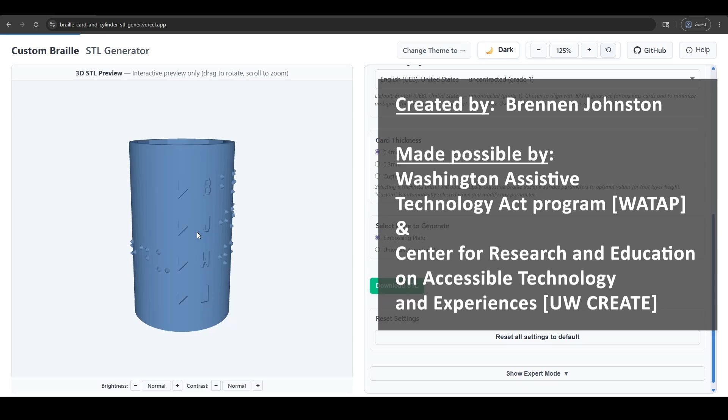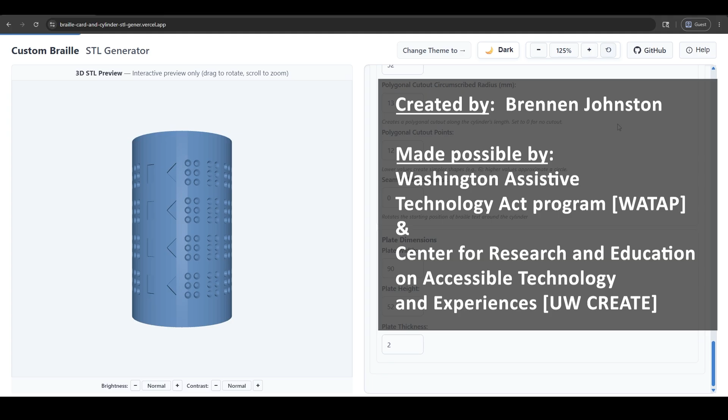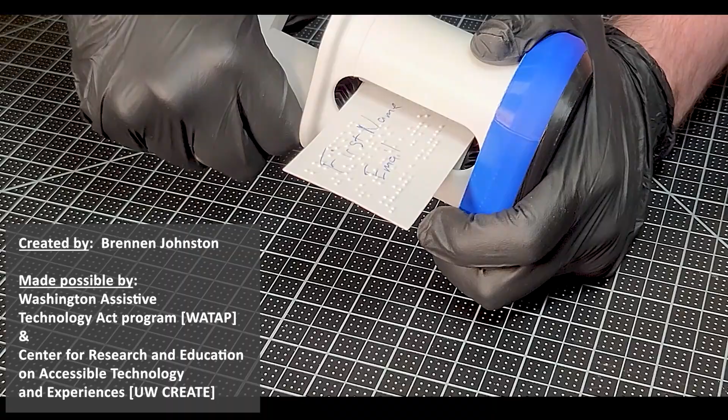In this video, we're going to create a custom Braille embossing cylinder from start to finish. Then download the 3D printable STL file for both the embossing cylinder and the counter cylinder. Both of these parts are needed for the 3D printed Braille embosser, which impresses a readable Braille dot into cardstock. By the end of this video, you'll have 2 printable STL files. In the next section, I'll cover 3D printer setting recommendations.

First, we'll start at the Braille Customizer app in a web browser. So here's the starting page. On the right side, you've got your text input area, language selection, card thickness, and plate selection, which is where most of the work happens. On the left is a 3D preview. It'll update as soon as you press the Generate button at the bottom of the menu.

You can find the accessibility controls at the top. You press this button to switch between dark mode, light mode, and high contrast mode. You press this button to increase font size or decrease font size. The 3D preview panel has its own brightness and contrast controls.

Before you type anything, the most important decision is figuring out what to put on the embossing cylinder. For this Braille embosser, it allows about 13 Braille characters per line. That means you won't be able to translate everything from a standard business card. The Braille Authority of North America, BANA, has published a prioritized list of recommendations for translating a business card into Braille for exactly this situation.

Translating your name should be top priority, and then at least one contact method. Next would then be job title, then mailing address, then fax number. For a more detailed explanation, please click the Help button in the top right corner, or use the link in the info panel. It covers what to include and why, and a couple of examples, which is all backed by BANA's recommendations. I'll paste all of my business card information into this Braille Customizer text area.

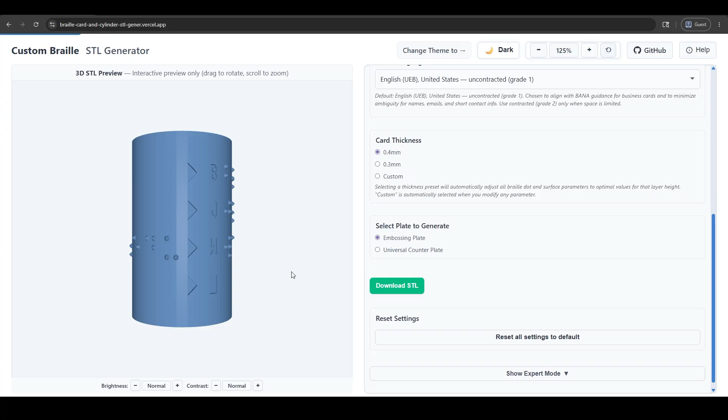Once it is fully generated, it'll appear on the left in the 3D preview panel. If you're using a mouse and keyboard, you can click on the cylinder to drag, rotate, scroll, and zoom, or you can use touchscreen controls to do the same thing. If you've generated your cylinder, you'll be able to see the braille dots on the cylinder surface.

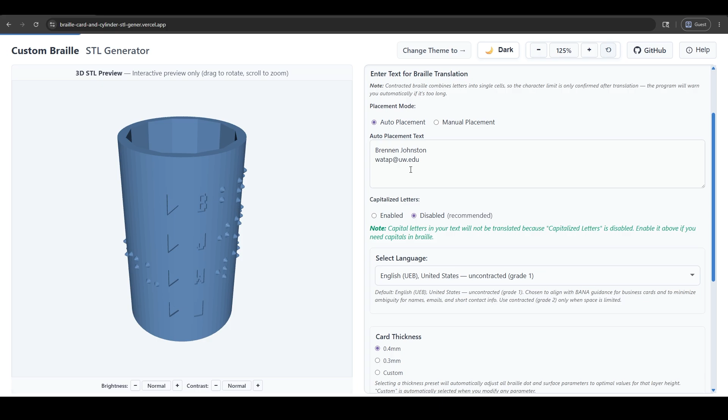Here in my example, this is the indicator shape area. Here, you'll see the indicator letters B, J, and W, which is just the first letter of each of the first 4 words. These indicator letters are to have a built-in labeling system for non-Braille readers. That way, if you print more than one Braille cylinder, you have a quick way to tell them apart.

Now let's download the embossing cylinder we just created. If it's successfully generated, then the Generate STL button should change to say Download STL. We'll click it again, and it'll start the download process. The embossing cylinder file should automatically be named after the first word that was typed into the translation.

Before we're done, we need to generate and download the counter cylinder to complete the pair. The counter cylinder has all the Braille dots activated. It was designed this way so that it could be used with any custom version of Braille that you might generate. So as long as the card thickness setting is the same, you'll only need to download and print one counter cylinder for as many custom cylinders as you would like.

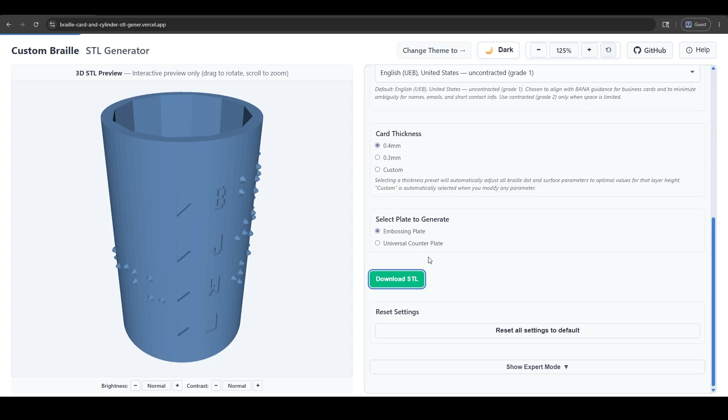To generate it, scroll down to the setting, plate selection, and select Universal Counterplate. Then press the Generate STL button again. Then press the Download STL button again. If you're going to experiment with different thickness settings, I recommend you add that information to the file name that you download. For example, counter cylinder 0.4 millimeters, so that way you don't have to second guess the size later.

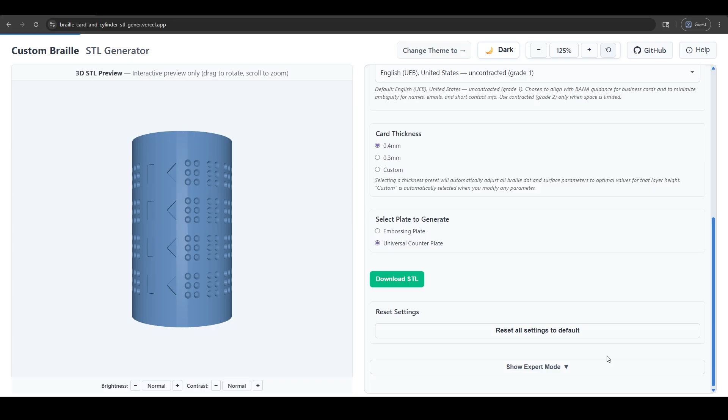For advanced control, there's an Expert Mode button at the bottom of the page. This section lets you control dot shapes, dot spacing, and many other things. You can find more information on this section in the help guide.

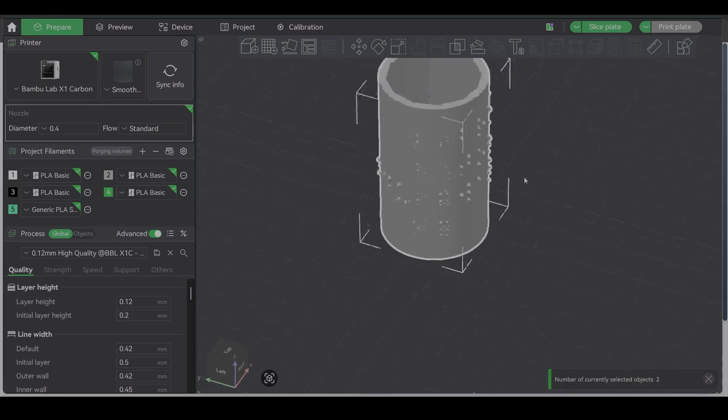Now that we've generated and downloaded both of our STL files, let's move on to 3D printer slicer settings. First, import both STL files into whatever 3D printing slicer software you'll be using. I'm going to be using Bambu Studio. In my experience, the seam painting feature makes a significant difference in Braille dot quality.

Most automatic seam placement settings will try to hide the seam in a visually inconspicuous spot. Common places are corners, edges, or inside recesses. It's totally fine for normal prints, but it becomes a big problem in our Braille embossing process. If a seam is placed either on a Braille dot or within the recess of a Braille dot, it can significantly change the embossing dimensions.

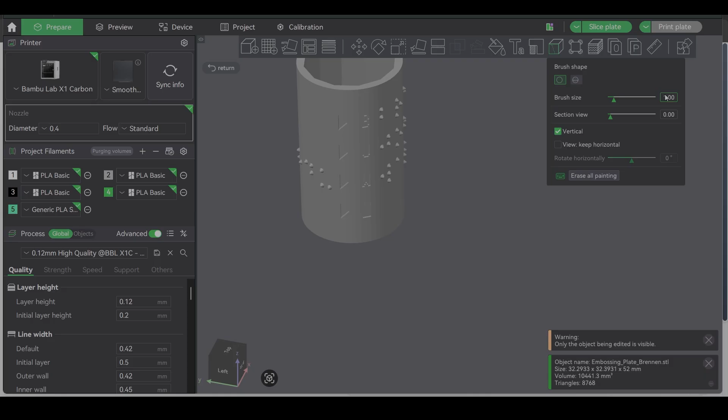So I recommend using the seam painting tool, so that way you can control the seams and place them away from all of the dots. I've set the seam painting brush to vertical mode and increased the size to 4. I've chosen to paint over the indicator letters and triangles. This now tells the slicer to put the seams in this area only. Don't forget to also do the counter cylinder.

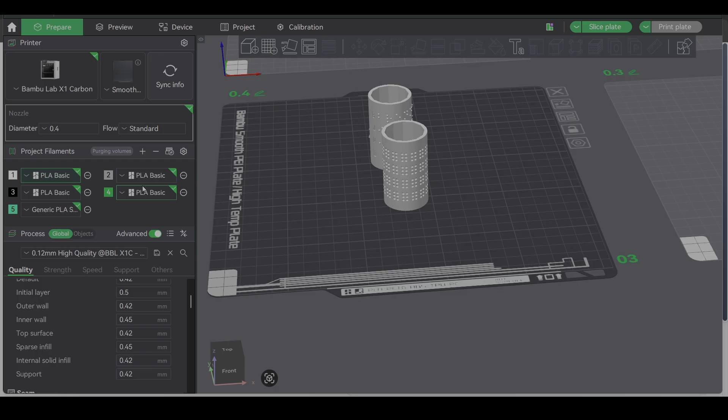I'm using a Bambu X1C 3D printer, and the following settings are what worked best for me. I start with Bambu Studio's high quality preset, but I've still had pretty good results for anything smaller than 0.2 millimeters. Here are a few changes I made from the default setting. First, I've changed the wall generator from Classic to Arachne. Arachne handles the small details of the Braille dots a little more consistently. The biggest difference I've noticed is a slightly more accurate recessed Braille dot.

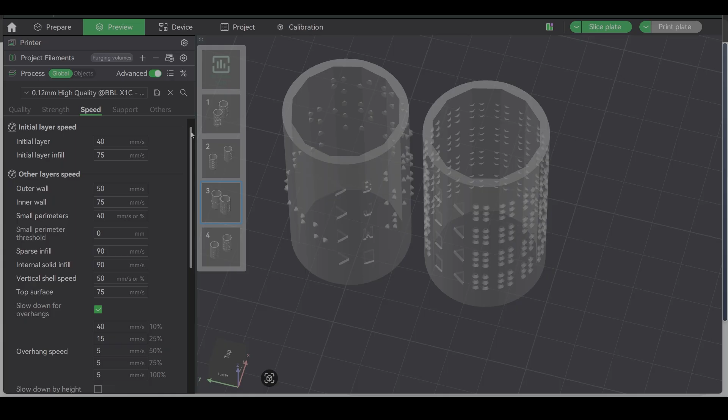Next, I reduced all default speeds to about half. So initial layer to 40, infill to 75, outer wall to 50, inner wall to 75, small perimeters to 40, and halved all the accelerations as well. For my printer, I didn't need any supports and I didn't need a brim.

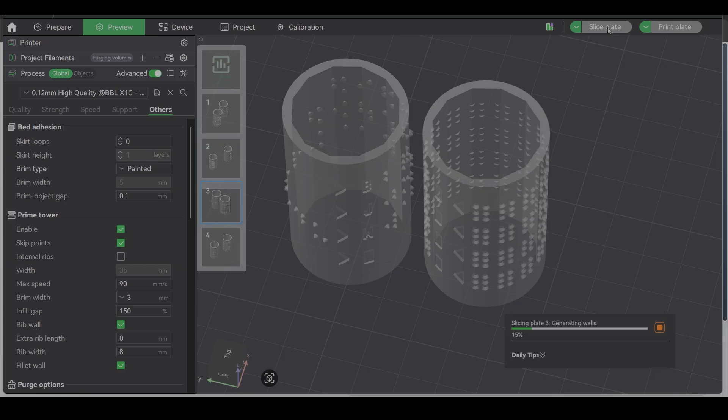These are just my starting points, so if you're still getting clean prints at a higher speed, you should just keep your settings. But if you're seeing Braille dot quality issues, I'd recommend slowing down the 3D print as a starting point. With these settings, using basic PLA on a Bambu X1C, I can 3D print both cylinders in about 3 hours. This Braille embosser was designed to maximize efficiency.

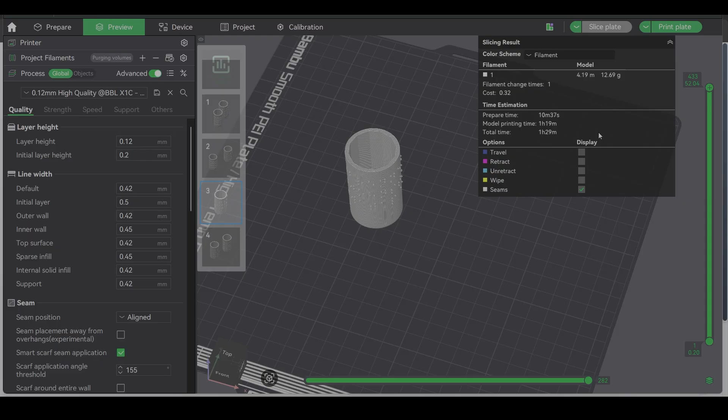Once the outer housing mechanism is 3D printed, and a counter cylinder is printed, it's much easier to update information or add information since you'll only need to 3D print a new custom embossing cylinder, which only takes about an hour and a half on my type of machine. In a group environment like an office or a classroom, each person would only need to 3D print their individual custom embossing cylinder, which only takes an hour and a half and a small amount of 3D filament. And that's it.